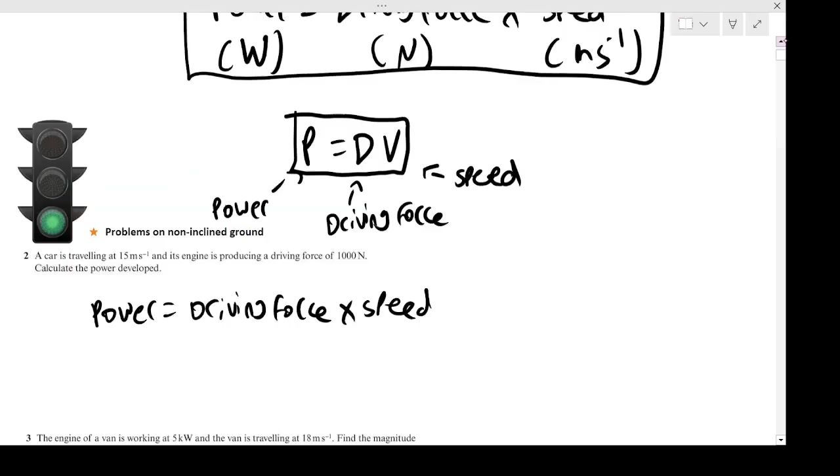So I got this question first. I'm told a car is traveling at 15 meters per second, and its engine is producing a driving force of 1,000 newtons. Calculate the power developed. So it's asking for the power effectively. So we know that the power, again, power is the driving force times speed, which we literally just went over a second ago here. So just simple use of a formula. My driving force, I'm told, is 1,000, and my speed is 15. Very simply, multiply them to get the power of 15,000 watts. Okay. And so there we are.

Okay, so now we've got this question, and I'm told the engine of a van is working at 5 kilowatts, and the van is traveling at 18 meters per second. Find the magnitude of the driving force. So essentially, he wants the driving force. Okay, so it's not explicitly mentioned power here. However, it says the engine of the van is working at 5 kilowatts. That's actually very subtly hinting at the rate of the work done.

Okay, so the engine is obviously pushing the van forward, right? The driving force. So the engine's pushing the van forward. The engine is working, so it's the rate. So that means the power is 5 kilowatts. Okay. Pay very special attention. They like doing that sometimes. They don't explicitly mention power.

Working very specifically means power. Okay, because remember, power is the rate of work. Okay, so the power is 5 kilowatts, but it has to be in watts. That's going to cause an issue. It's in kilowatts. So remember again, a kilo is 1,000, so we need to multiply by 1,000, which is going to be 5,000 watts.

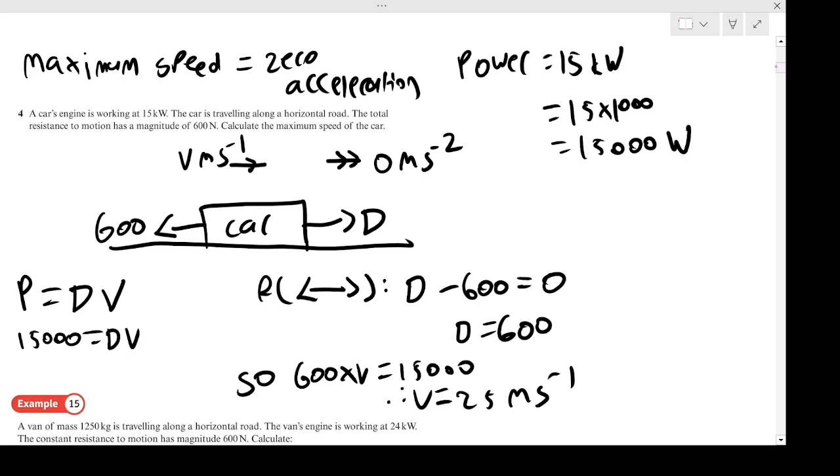So yes, we will be resolving a lot in this video. And so again, if you haven't seen it in normal maths, make sure that makes sense. But there we are. Okay, we've got this example here.

So now I'm told a van of mass 1,250 kilograms is travelling along a road. The van's engine is working at 24 kilowatts. The constant resistance to motion is 600. Calculate the acceleration of the van and the maximum speed. So it's kind of similar, but it's still a bit different to the last example. But let's have a look. Let's try and figure out what's going on.

So again, immediately I can spot this. The power is 24 kilowatt, and again we need to convert that to watts. So that's 24,000 watts, times by 1,000, right? There we are. Okay, now if I draw the situation again, it's on a road. I've got my van. I'm also told the mass now, which is 1,250 kilograms. I've got my resistance force, which again, if the van is going to be moving forwards, the resistance will act backwards like this, and that'll be 600.

And then there will be a driving force because there's power involved. Power means there's a driving force moving it forward. I'll call that D. Okay, and there's also going to be some speed and acceleration. So firstly, speed. I'm told the speed is 6. Okay. Now the acceleration is what they want me to work out. It's asking me to work out the acceleration at this speed. I'll call that A. Okay. So I need to figure out the acceleration.

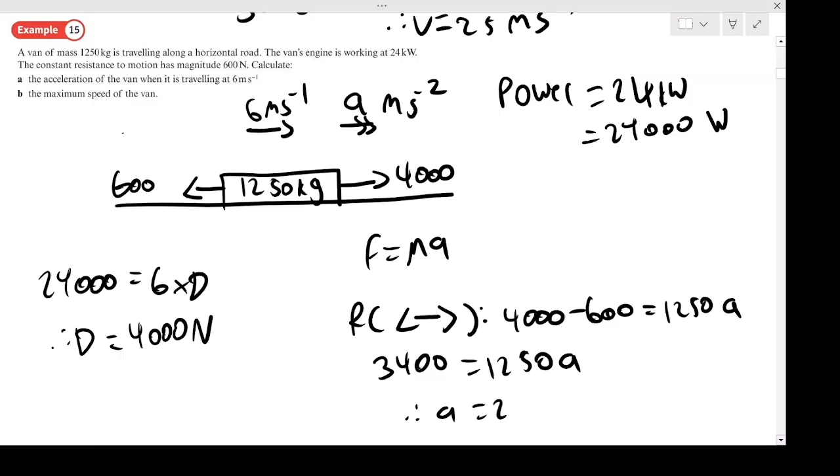So if I resolve again, forwards and backwards, right and left. Well, my right force is my driving force, which we found to be 4,000. Take away my backwards force of 600, my left force. And so that will equal mass times acceleration. Again, F equals ma. So the mass is 1,250 times A. Well, actually, if I just simplify this equation, that would be 3,400 equals 1250A. Then I can just divide by 1250 to get A. And I get 2.72. And there we are, meters per second squared.

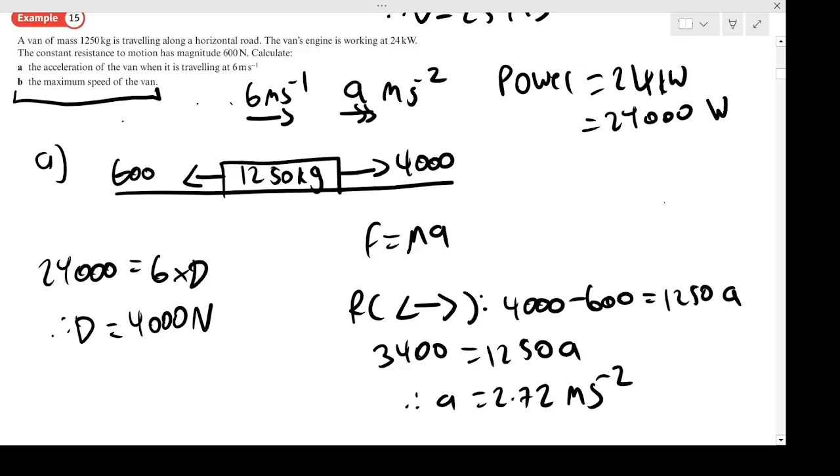Okay, and so now in part B, it's asking us to find the maximum speed of the van. Okay, so if I draw this new situation here. So I've got my van. Again, it will have the same mass, 1250 kilograms. The resistance force is still going to be 600 because it's constant, which means it will always remain the same. So that'll go back 600. The power of the van is still 24 kilowatts. The power remains the same as well. So 24 kilowatts. Well, that's 24,000 watts. So that's my power. Okay.

And so again, there will be a driving force acting forwards because power exists. However, in this case, not the power, the driving force, is going to be different. So I'm going to say D dash, okay, to signify it's a different D. So it's a different force to in part A, because the driving force now may change because the speed is going to change. Okay, so the speed changes, it's likely the driving force will also change with it. Because in part B the speed is different. It wants to find the maximum speed now.

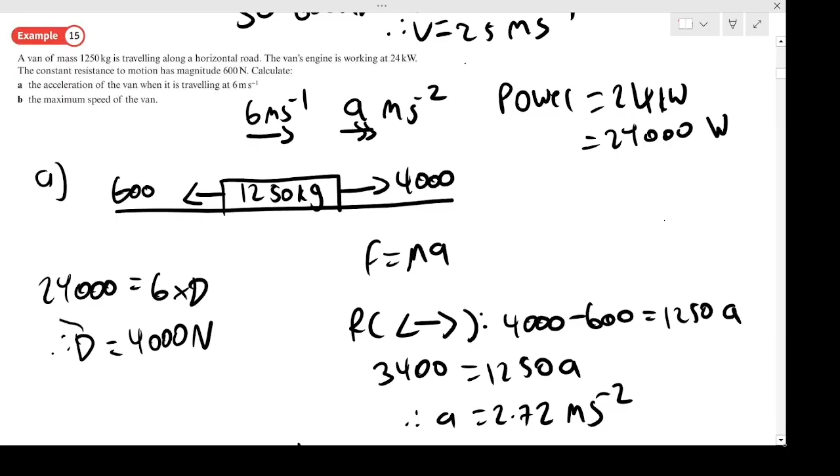And you can see it is different because my driving force in part A was 4,000 newtons, but now it's gone down to 600. So it may change, okay? So there we are. But now I know my driving force, so then I can use my power to say that 600 times V is going to equal 24,000, which therefore means my speed V is going to be 40, okay? So that is my maximum speed. Cool.

Okay, so hopefully you got the gist now of how we use power. Now we're going to look at more problems with angles. Okay. So we've got this example here. A car of mass 2,600 kilograms is traveling in a line. The instant when the speed is v, the total resistance is a variable force of 800 plus 5v squared newtons. The car has a cruise control feature to adjust the power to maintain a constant speed of 18 meters per second.

Find the power when, firstly, the car is on the horizontal road. So a horizontal road means it's completely flat like this, like we used to, right? Okay, so if I add my car, here we are, the mass is 2,600 kilograms. Now, I'm told the speed is v. However, they've told me actually speed is constant at 18, so actually I can just change that to 18, really.

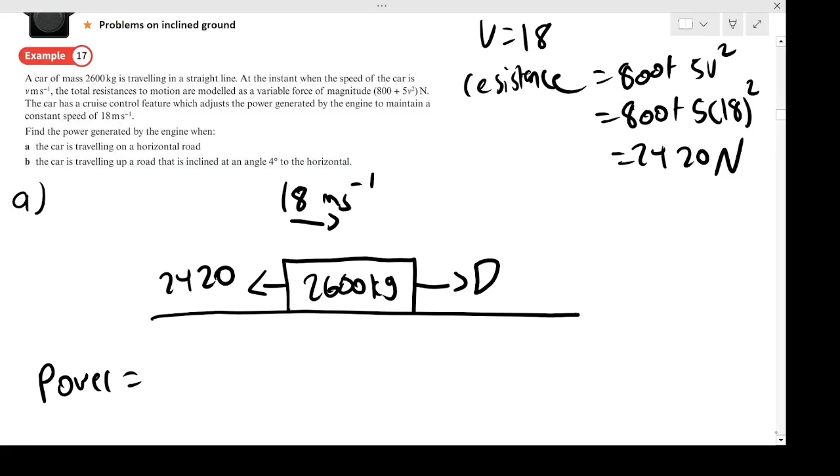Okay, so I can add that on to my resistance here. So the speed is 18, I'm told it, and then I can work out my resistance as well. There will also be a driving force because there's power. I'll call that D. And speaking of power, they want me to find the power. So my power is again speed, which is 18, times driving force D. So in order to find my driving force, I'm going to resolve forwards and backwards as usual. I've got my driving force forwards, take away my 2,420 backwards.

That's going to equal mass times acceleration, so 2,600. Now the acceleration, they've not told us explicitly, but I'm told that the speed is constant, which means the acceleration has to be 0. So constant speed, so the acceleration is 0, so it equals 0. Therefore, my driving force is just 2,420. Now we can easily work out power. Sub D in: 18 times 2,420. Get 43,560 watts. And so there we are.

Okay, now in part B, we're going to look at an angled slope. Now we're told the car is travelling up a road that's inclined at 4 degrees. So it's going to look like this. The angle probably is going to be a bit off, but I'm not that worried about that. So again, we've got our car on this surface that's 4 degrees, right? Again, the mass is 2,600. The numbers are going to be the same, so the speed is still 18. It's going to go up the slope with speed 18.

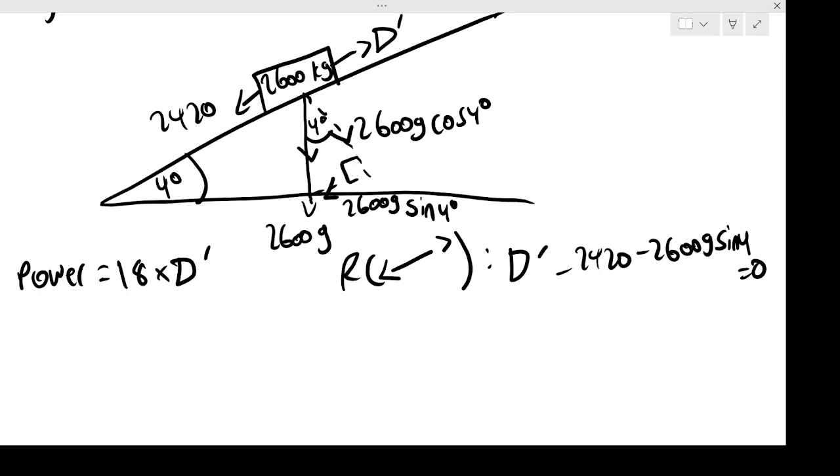Now, the force that acts along the surface, you can tell it's going to be this force here. It's 2,600g sin 4, and that's going to equal 0 because acceleration is 0. Okay, so that's just resolving forces on an angled plane. We've seen some examples previously, and hopefully you're familiar with this. So if I just rewrite this, bring it over here to make it clearer. So we have a driving force, take away the resistance, take away the weight that's along the surface.

So now we just simply solve this equation for D. So D is going to equal 2,420 add 2,600g, where g is 9.8, times sin 4. We get 4,197.4 newtons there. So that's my driving force. Therefore, my power is going to be 18 times 4,197.4, and that will get me 75,553.11 watts. And there's my power there.

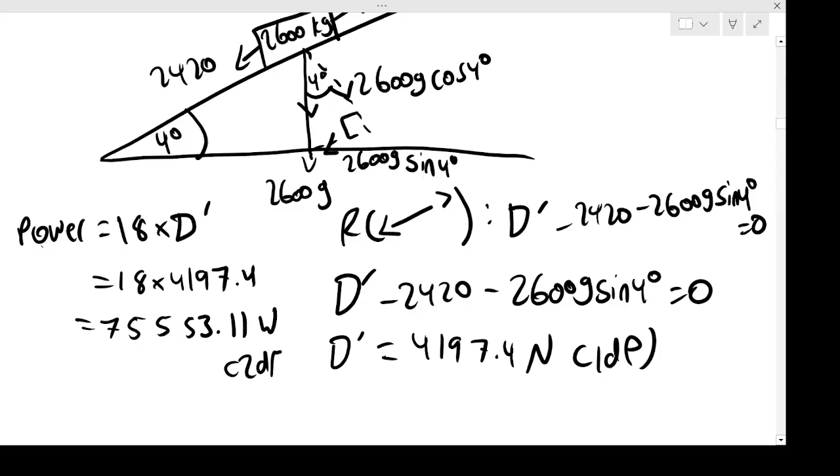Okay, cool. So it's the same idea, but now it's on the surface, so our resolving is going to be a tad bit different. Okay, but there we are.

Okay, so we've got this question here. So here I'm told a car of mass 1,100 kilograms is traveling at a constant speed of 15 along a straight road, which is inclined at 7 degrees to the horizontal. The engine is working at a rate of 24. So again, working rate, that's the language for power. So the power is going to be 24 kilowatts. And the kilo has to go to watts, so we need to times by 1,000. You get 24,000 watts.

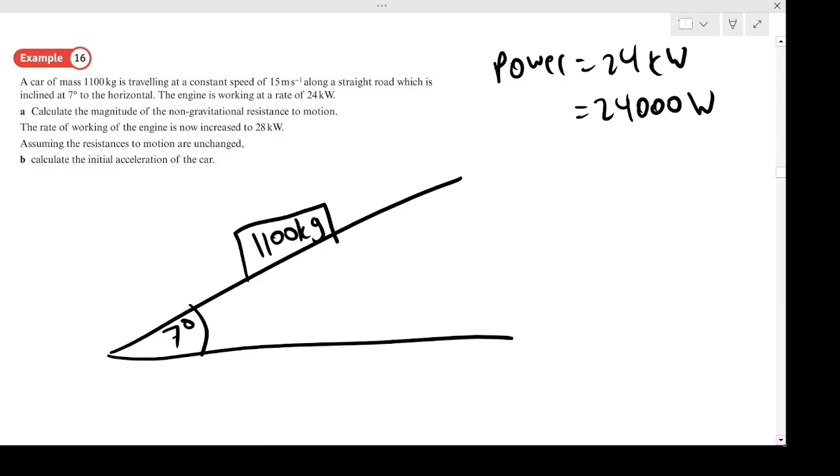Okay, so now if we actually draw the situation, I've got this angled slope. It's 7 degrees. I've got my car going up this little road at the angle 7. My car mass is 1,100 kilograms. The speed is 15 up the road, and because it's a constant speed, the acceleration is going to be 0. There we are.

Again, we've got our forces. So firstly, we've got resistance. So the resistance force acting that way. I'll call that F for, I don't know, like friction or something like that. So that's my resistance, and then my driving force is moving my car forward. Again, driving force because there's power involved. And I will add my weight. So that's mass times g, so 1100g. Hopefully we're fine with this diagram. That's pretty much it. Let's see what we need to work out.

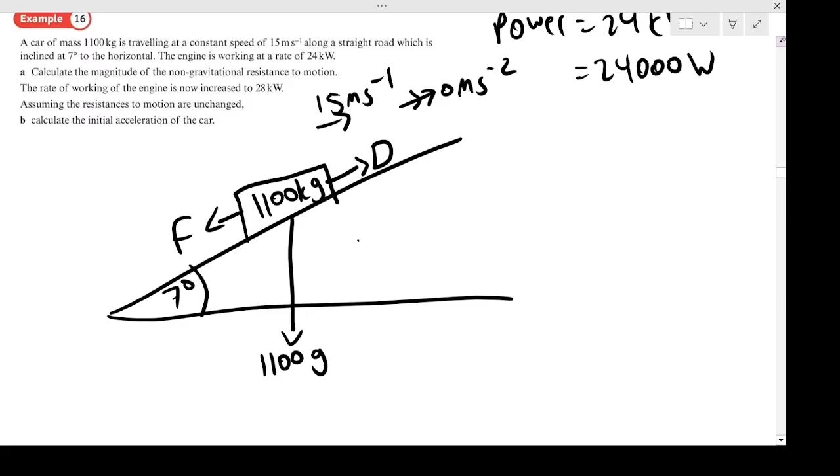We need to calculate the resistance force, essentially. So we need to find F. Well, firstly, I already have my power, so let's use that. Power is driving force times speed. So P equals DV. I know my power is 24,000. I also know my speed is 15. There's 15 lots of my driving force D. So dividing by 15, I get 1,600 newtons. Okay, so I'll add that on then. Cool. Right, but that's not my friction force, unfortunately. My resistance force.

What can we do now? Well, we can then resolve. Okay, I know my acceleration is 0. So if I resolve up and down the surface, then firstly up the surface is my 1600. Take away my resistance F. And then obviously there will also be a weight as usual. I need to split the weight up, so 1100g cos 7 and 1100g sin 7 here.

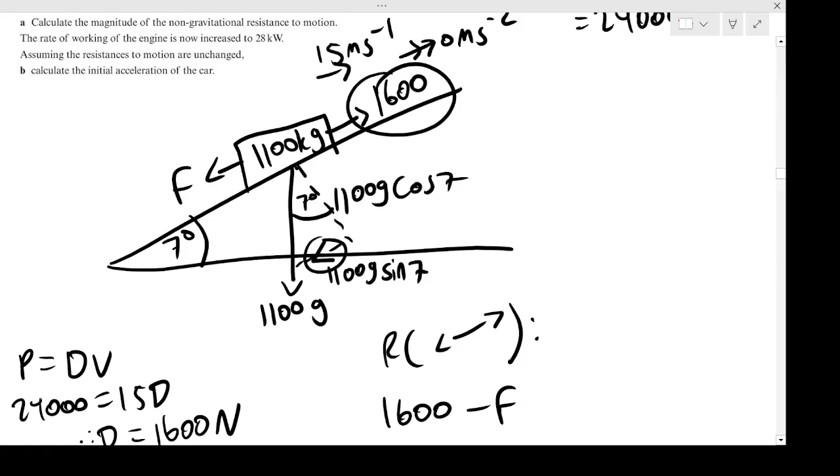Okay, so this 1100g sin 7 here, that's going to again be matching the slope, so that's going to act downwards. So that's going to be taken away. And so that's going to equal 0 because the acceleration is again 0 because the speed is constant. Okay? I can actually work out F then. So F is going to be 1600 take away 1100g sin 7.

So if I just put all that in the calculator, I get 286.25 newtons. And there we are. Okay, that's my F there. That's my resistance force.

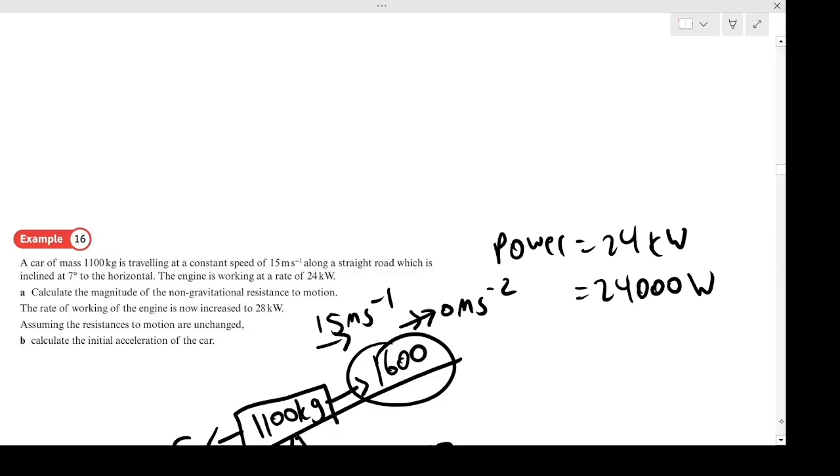Cool. Now I'm told the rate of working is now increased to 28 kilowatts. So the power's changed, and the resistance is not changed. Okay, so I'll make a note of that. The power is now 28 kilowatts. And in watts, that's 28,000 watts. Must do that conversion to watts.

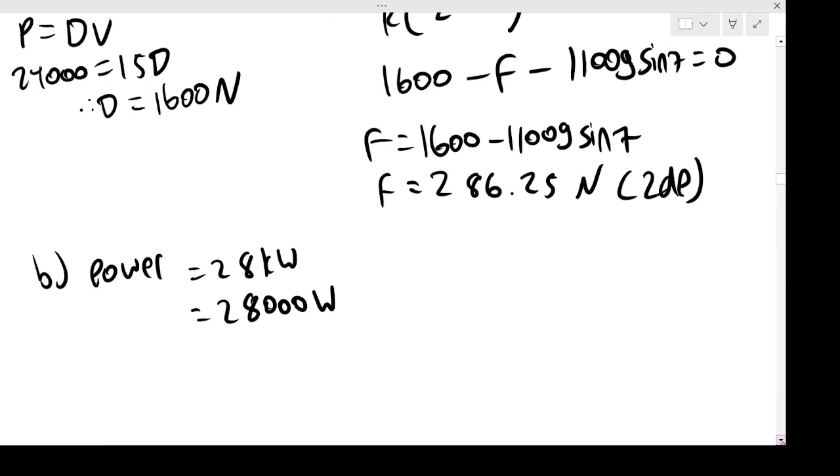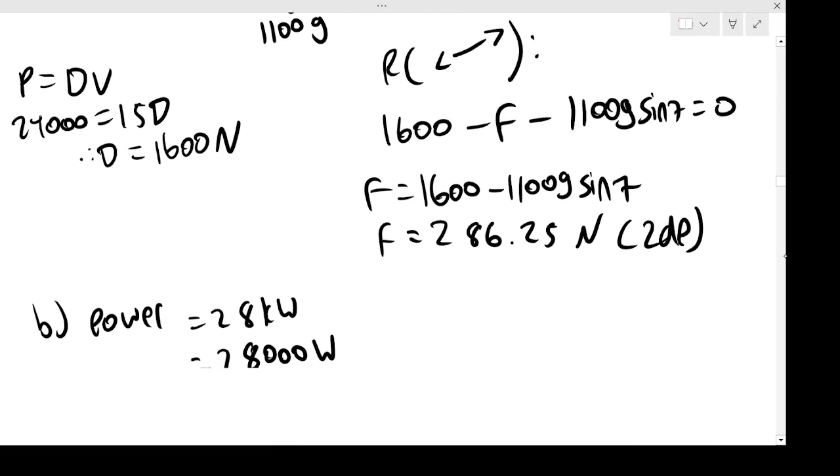Okay, so then if I draw the situation now, draw this diagram. It's still at 7 degrees. Again, not accurate, but there we are. Still got my car, that's 1100 kilograms. I have my resistance force, F, which I'm told is the same. So it's still 286.25. I'm going to have a driving force which probably will change now, so I'll call that D dash for a new driving force.

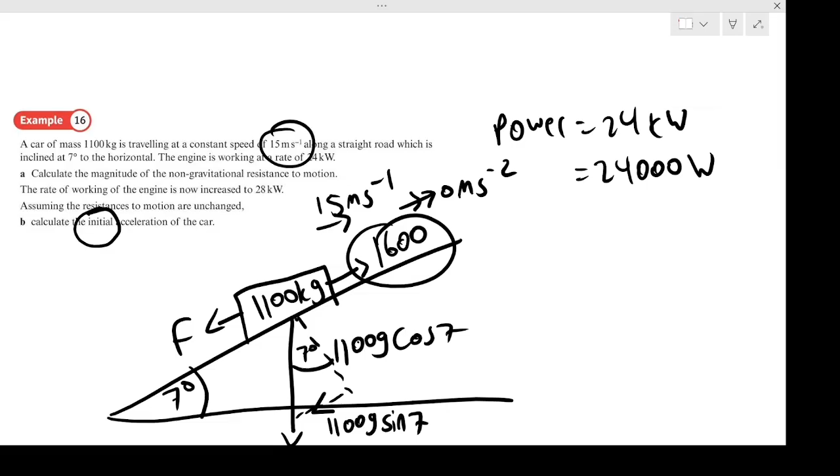Now, the speed will change as well. However, we're assuming that the speed will still start at 15. So the speed will now change. It won't be constant. But because we're only asking for the initial acceleration, at the start it will still be 15, but then the 15 will change. So the speed is still 15 initially in this situation here. Hopefully that made sense. The acceleration is what we want to work out, the initial acceleration after we change the power. So hopefully you are comfortable with this new setup.

Okay, so we want to find the acceleration. We know our power. We also know our speed. So actually we can work out a driving force. So power is again D dash times V. My power is 28,000. That's going to equal D dash times 15. So therefore my new driving force is going to be 1,866.67 newtons. There we are. I could add that on.

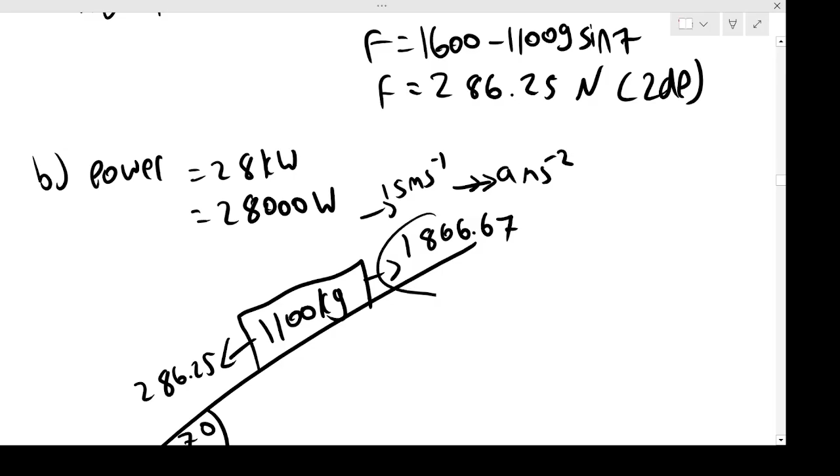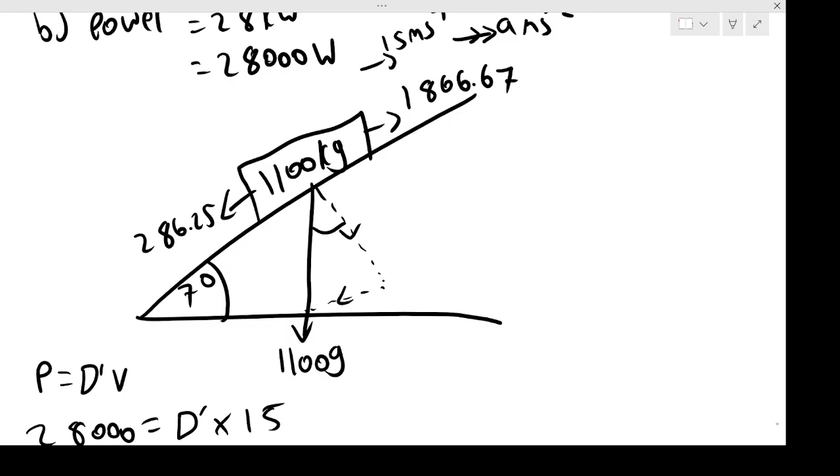Okay, cool. So if we want to find the acceleration, we're going to use F equals ma. We're going to resolve our forces again in the same way. Actually, I'll do it down here, not to make it too messy. So firstly, the forces up the surface. We've got my driving force, 1866.67, and then I have my resistance the other way, so take away 286.25, but of course there will also be weight involved. So my weight, 1100g, split up into these two parts: 1100g cos 7 and 1100g sin 7.

So again, we want to use the 1100g sin 7, because that's matching the direction of the slope, but it's going backwards, right? It's going to the left. Okay, so take away 1100g sin 7. So then that will equal ma. Now the acceleration is no longer 0. It's changed. So mass is 1100, so 1100 times a, the acceleration. Okay, so I can work out a now.

So if I now just simplify this equation, I get 266.668... equals 1100a. Therefore, just divide to get a to be 0.24, and so there we are. That's my acceleration.

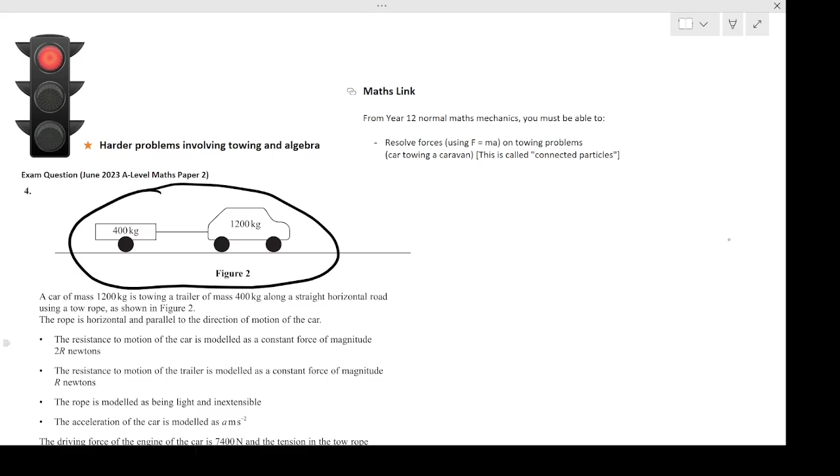Okay, so now we're going to look at the final set of questions. We're going to look at some exam questions in a bit. We're going to be looking at power involved with towing problems. You would have seen this from normal maths: problems where you have a car that's towing a caravan or some piece of weight. You can see it in this example here, a car towing some little thing there. So this is from normal maths, from year 12. But depending on how you do this course for further maths, sometimes you might do it before normal maths.

So anyway, it's just nice to have a recap of the essential skills you need. So what I'm going to do with this sort of problem, this was taken from an A-level maths past paper. I'm going to go over this little question quickly, just to demonstrate what you need to know, because you're going to need to know how to solve a problem like this for the other problems in a minute, okay?

So very quickly, this is the situation we've got going on. As I said, I've got a car that's towing, by some little rope here in the middle, something like a caravan. And so, if I draw this out a bit bigger, okay, so we're on a road. I have my car. Now the car, the mass is 1200.

Okay, it's towing, I'm gonna say, a trailer. A trailer. Okay. This thing here, and that has mass 400. Okay. So I'm just drawing it out in this way.

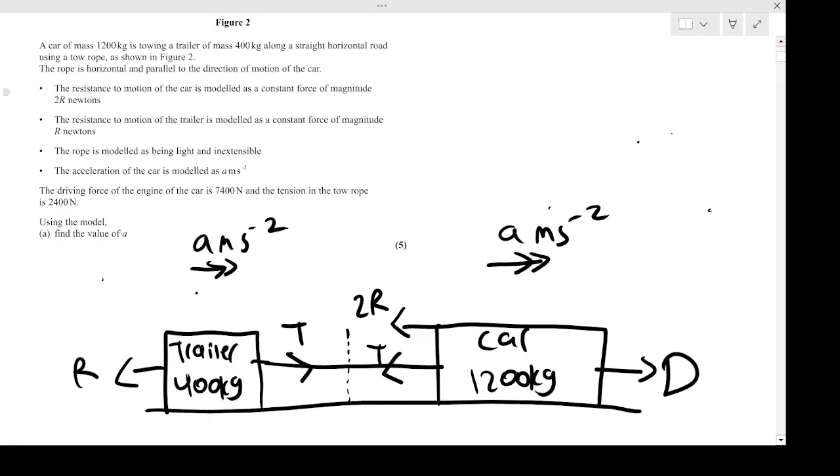So very quickly then, I'm also told the driving force of the car is 7,400. So I can say that the driving force here is 7,400, and also the tension in the rope, T, is 2,400 and 2,400 there. So we need to find the acceleration. The approach here is to look at the car and the trailer separately. All of this you hopefully should be familiar with if you've seen it in normal maths. So we're going to look at the car first.

To make it easy to visualize, I'll just draw the car on its own. It's got driving force forwards of 7,400, my resistance force of 2R, my tension force of 2,400 and the acceleration A. That's literally it. So I'm going to use F equals MA, resolving forwards and backwards. My forwards force is the 7,400, take away the two forces backwards, so take away 2R, take away 2,400, equals MA. The mass of the car is 1,200 times the acceleration.

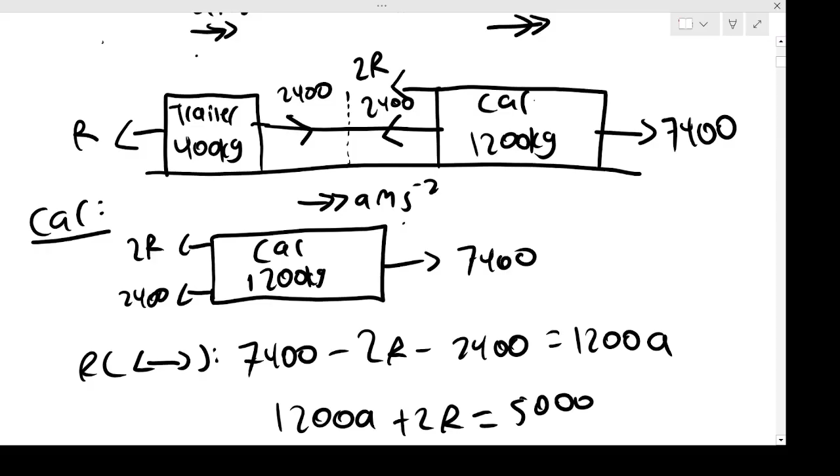And again, I'm going to just focus on the trailer. So if I just draw the trailer bit out, again, I've got my trailer. The mass of the trailer is 400 kg. And so as you can see here, the force forward is 2,400, and the force backwards is R, my resistance. Again, the acceleration will also be A.

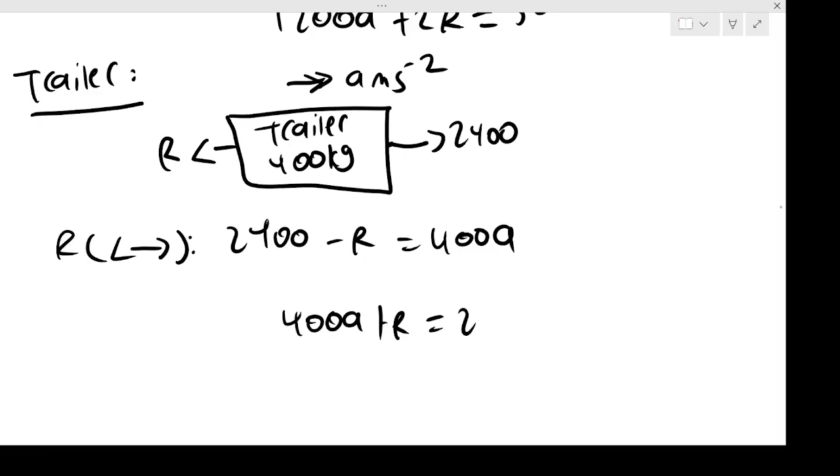Same one. So if I then resolve forwards and backwards for the trailer here, we get 2,400 take away R, going to equal MA. The mass is 400, lots of A. So again, we get this equation: 400A add R equals 2400. Now, what you notice then is these two different equations, one from the car and one from the trailer. And hopefully you notice we get some simultaneous equations.

So 400A add R is 2400, and 1200A add 2R is 5,000. So at that point we get these two equations simultaneous. We just solve them like any simultaneous equations. So we need to find A.

So very quickly, what we can do is times the first one by 2, let's say, to get 800A add 2R equals 4800, and then we can take these two away. So 1200A take away 800A, 400A. 2R take away 2R goes to 0. 5,000 take away 4,800 is 200.

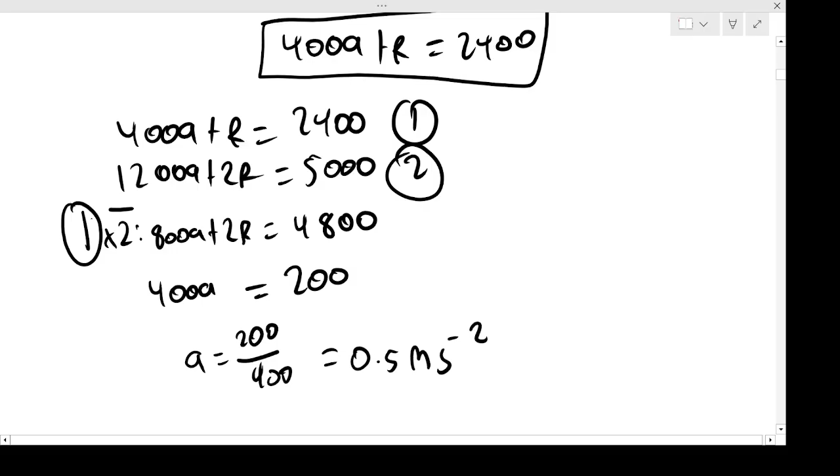So then to get the acceleration A, we just do 200 over 400, and doing that will get me the acceleration of 0.5 meters per second squared. There we are. So that's just a general rundown of these sort of towing problems, right? A car connected to a trailer, something like that. That's the idea. So we have this sort of diagram.

Hopefully you're comfortable with the forces I've added on. And the idea is to split up the car and the trailer separately to obtain what we want. Okay, so there we are. We'll be using what we've seen here now with these questions.

Okay, so we're going to look at this exam question, which is going to involve towing. So we have a car of mass 1,000 kilograms in a straight line along a horizontal road, constant speed u. The resistance is 400 newtons. The engine is working at a rate of 16. That's by power, right? That's 16 kilowatts. That's going to equal 16,000 watts.

Now, again, if I draw the situation, I'll do it here. Again, I've got my car on a road. The mass is 1,000 kilograms. The speed is u, and it's a constant speed, which again means the acceleration is 0. And so then there'd be a driving force moving it forward, because again there's power, and a resistance force, which we're told is 400, right?

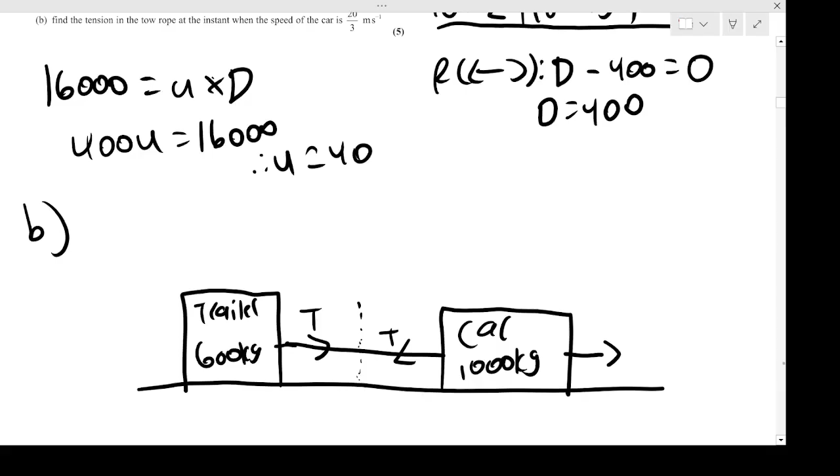Am I told what it is? I don't think so. So I'll just call that D, the driving force D, right? Again, I know there's a driving force because there's power mentioned, okay? Anyway, I'm also told resistance. So the resistance force for the car is 400. So again, if the car moves forward, the resistance is 400 that way. And then the trailer has its own resistance, which is 300, okay?

I think that's really it. Now, now it's going to be traveling at a speed. Has it? The speed, I assume, is still u. Okay, the speed is constant. Okay, so the speed is still going to be u, which is 40, right? And the acceleration, because

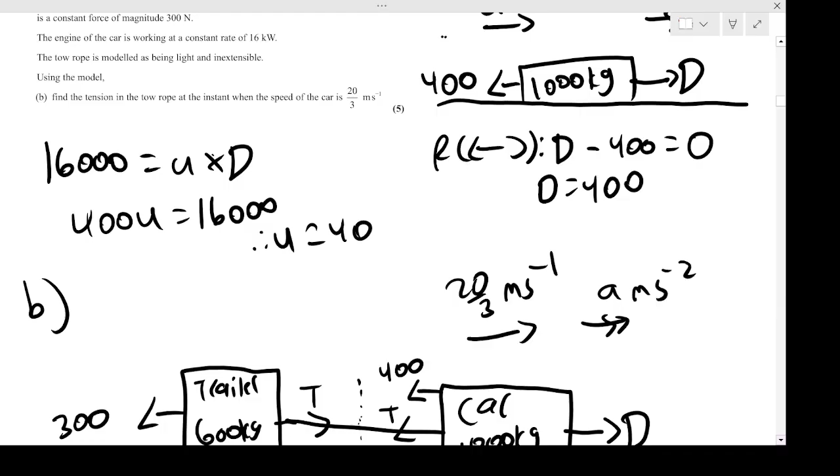Oh no, sorry. No, the speed is different because they told us the speed is now 20 over 3. My apologies. Because it's a different situation now, right? It's pulling a trailer, so it wouldn't be the same speed now. So they told us the speed is 20 over 3. Should have read the question there fully. There we are, though. That's the speed. The acceleration is going to be A. It's not a constant speed now, so the acceleration is not necessarily zero. Right, I think that's everything to label.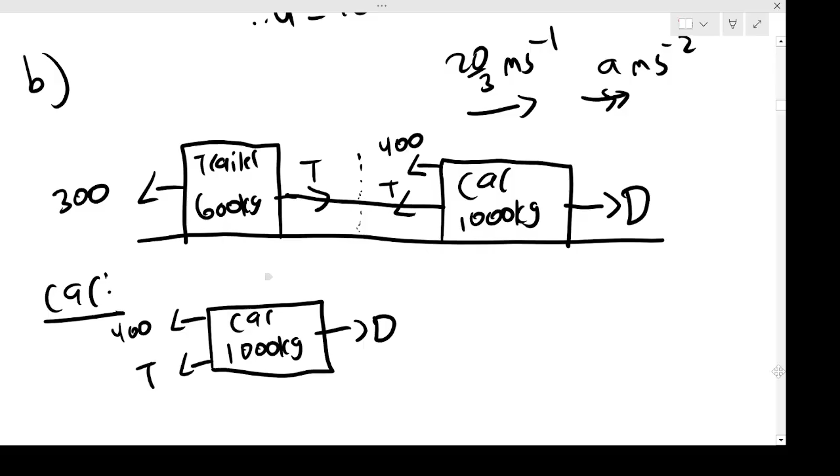Okay, a lot of stuff going on here, but hopefully that made sense how I got to the diagram. Once you get to the diagram, it mostly should fall into place. So they want the tension, which again is this tension force T. So what I'm going to do is split up the car and the trailer separately. Firstly, let's have a look at the car. Just to make it easier, I'm going to draw it separately. I've got driving force forwards, then my 400 Newton and my T. This acceleration is going to be A, and my speed is 20/3.

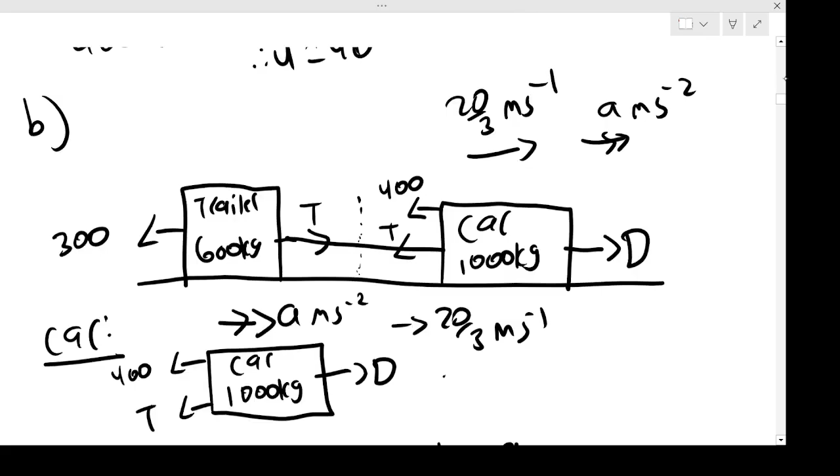Okay, so again, I could resolve forwards if I want to. That's going to be D, my force forward, take away these two forces backwards, so take away 400, take away T, equals MA. Now the mass is 1000, the acceleration is A. Now I can't do anything here. I don't know D, I don't know T, and I don't know A, so it's not really ideal. But I know the power is still 16 kilowatts or 16,000 watts. So I'll make a note: also power is 16,000 watts.

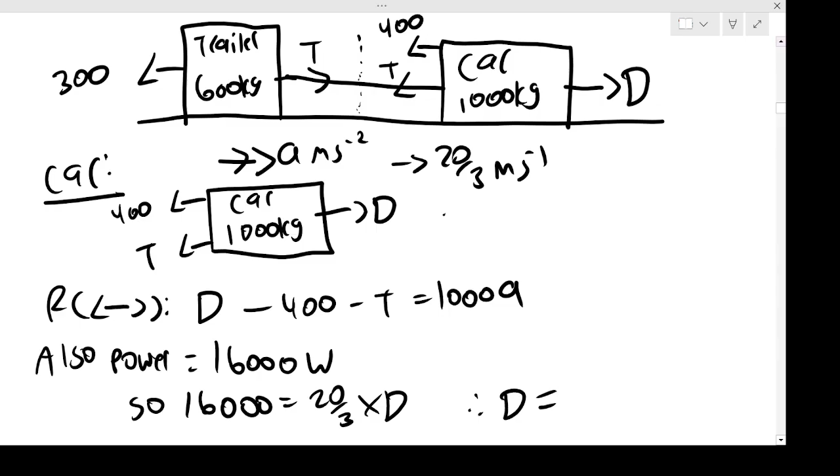And I also know that power is speed times my driving force. Now the speed I'm told is 20/3, right? Therefore my driving force, if I do 16,000 divided by 20/3, put that in the calculator, I get 2,400 newtons, and there we are. I can add that on here. I'm going to box this equation here. I'll come back to that. That's everything to do with the car. Now I'm going to look at the trailer.

Okay, now the trailer. If I draw the trailer here, that's 600 kg. I have the tension acting forwards and the 300 resistance backwards. Again the same acceleration there. And so if I resolve forwards and backwards here, again use F equals ma. So my forward force is T. Take away the backwards force 300 equals ma. Mass is 600 times acceleration a. So we get this equation here.

So ultimately, this is my equation from the trailer, and this boxed one is from the car. So if I combine this together, if I copy the car one, I have D take away 400, take away T equals 1000 A. But actually, we do know what D is. Remember, we saw that D was 2400. So we can sub that in here. And so 2400 take away 400 is just 2000.

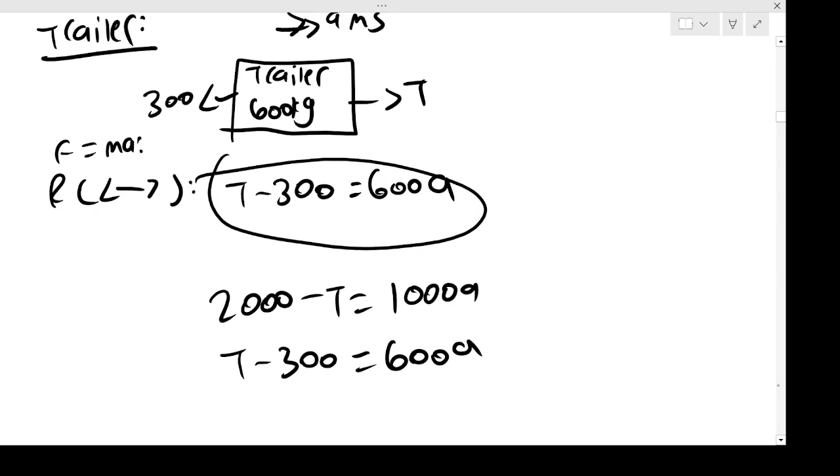So 2000 minus T is 1000A. And then if we remember this equation we just got, we got T take away 300 is 600A. And so these two equations now are simultaneous, so we can solve them. So firstly, if I rewrite this just a little bit, if I say minus T add 300, hopefully then you can spot we just need to add them to get rid of the T. So then I get 2000 take away 300 is 1700 equals 1600A.

Therefore, A is going to be 1.0625, and that's all the digits. Okay, there we are. Now I can sub that in to find T. So if I substitute it into this bottom one, T take away 300 is 600 lots of A, which is 1.0625. Therefore, T is going to be 300 add 600 lots of A. So I get T to be 937.5 newtons.

And that, I believe, is the tension in the tow rope. There we are. Okay, so that's the whole idea, right? Again, we just consider the car and the trailer separately, and after that, it's basically the same sort of steps. Okay, so I've got this question here. There's no towing involved here, but it's a bit of algebra this time.

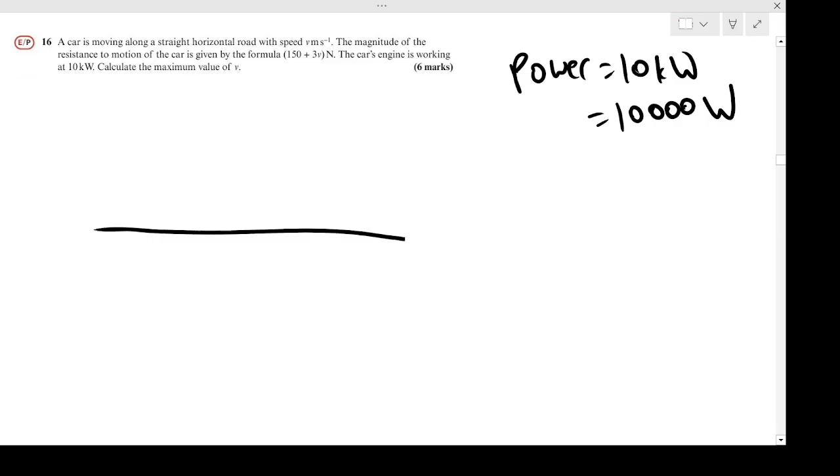So we're told a car is moving along a straight road, speed v. The resistance is this formula here. The power is 10 kilowatts. Again, I'm going to note that the power is 10 kilowatts, which is 10,000 watts. Okay, so if I draw the situation, I have my car. They've not told me the mass of the car, weirdly, so I just have to leave it there for now. There's my car. The speed is v.

Again, there's going to be a driving force D because there's power involved. But also there's a resistance force. Now the resistance force is actually this expression here, 150 add 3v. It's in terms of v. But again, don't be thrown off by this. It's going to be the same steps, just with algebra with letters involved. They're asking me to work out the maximum value of v. Now, v is a speed, so it's just asking for the maximum speed essentially.

But we know that max speed means the acceleration is 0. So I can add that on: 0 acceleration. Right, so I need to find v here. So firstly, again, I'm going to note my power. Power is 10,000. That's going to equal my driving force D times speed v. Of course, to find v, I'm going to need my driving force. If I resolve forwards and backwards, it's going to be D take away...

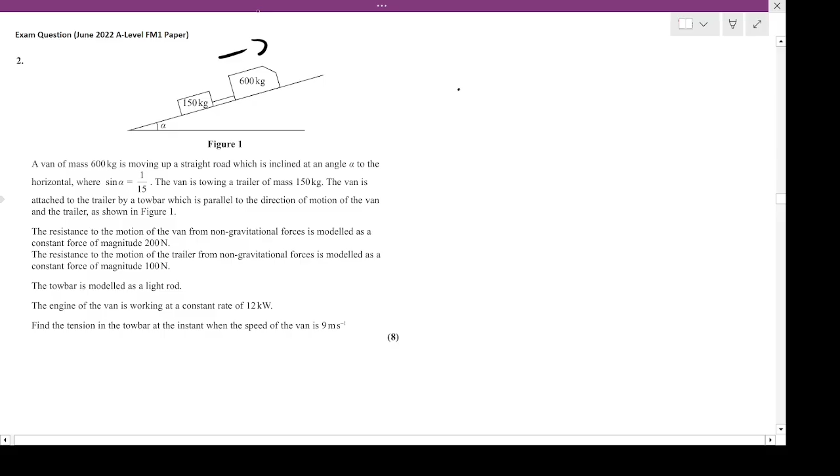The van's towing the trailer. And we're given some information about resistance forces. The power, the engine is working at 12 kilowatts. We should know that means it's power. So the power is 12 kilowatts, which again means in watts is 12000 watts. Okay? And it's asking for the tension, given the speed of 9. That's actually quite similar to one of the earlier examples we just looked at, but it's quite meaty, 8 marks.

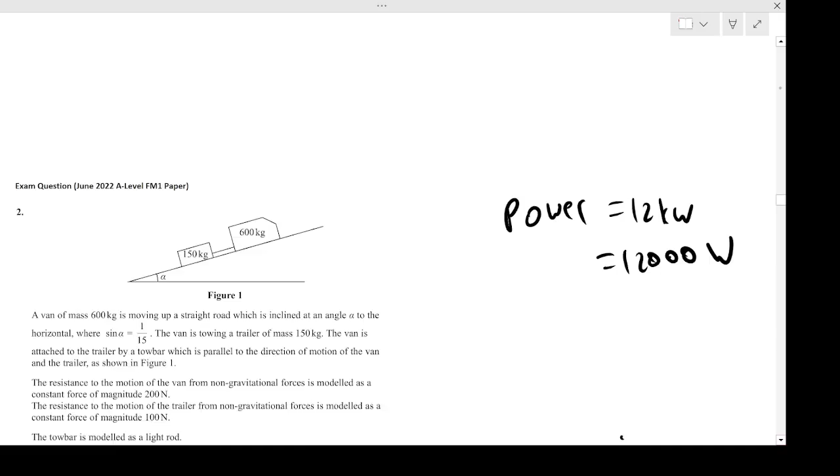Now, even though they're giving you a diagram, I do think it's helpful to draw it even bigger on your own, because there's going to be a lot of things we need to draw on. It's just not enough room, I don't think. Like, draw it really big like this, right? So again, we've got my car. Now, the car is 600 kg. That's towing a trailer like this. So this is my trailer. The trailer mass is 150.

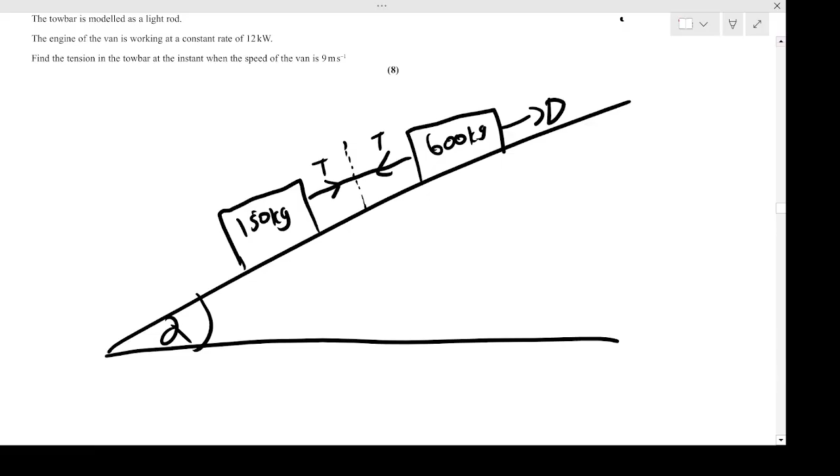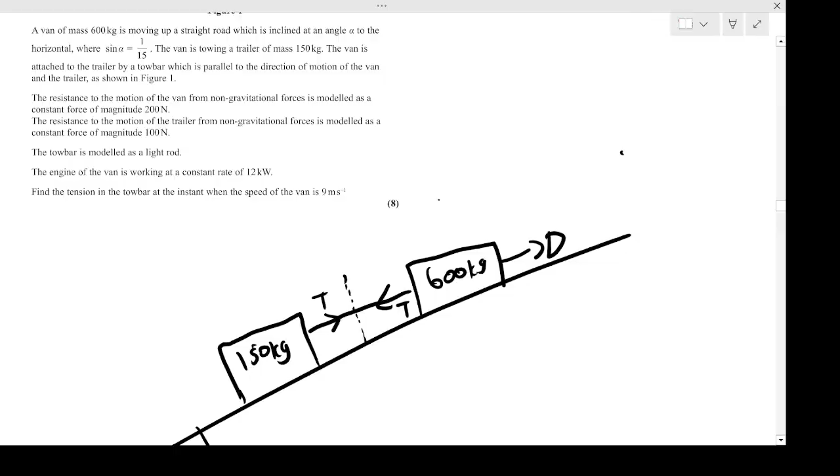Okay. Now, right, we need to add on our forces. So, firstly, in the rope, there's tension either way. So this is the car, right? So the tension is going to go that way, and then tension that way for the trailer. And then there will be a driving force up the ramp at the car, because that's what pulls it forward. There's power. There we are. Then we've got our resistance forces. So they told us the resistance of the van is 200. So at the van, which again is here, that's going to be 200 backwards. And then for the trailer, the resistance is 100.

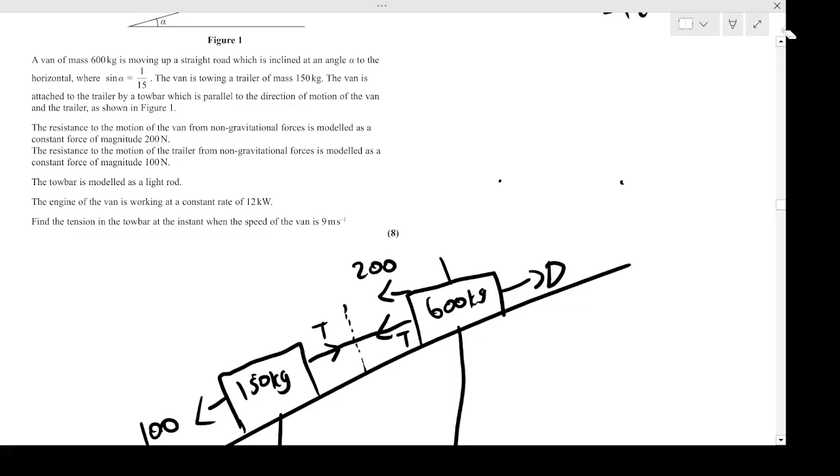So hopefully you're with me here, how I got this diagram here. I think that's all the forces, I believe. Of course, there will be mass as well. So the trailer, if the mass is 150, the weight will then be 150g. Likewise for the van, the weight is 600g. Remember, weight is mass times g. And that's all the forces. Obviously, there'll be a reaction force, which will be different, R prime, but I'm not gonna overcomplicate it unnecessarily. So those are my main forces here. So hopefully you're happy with this.

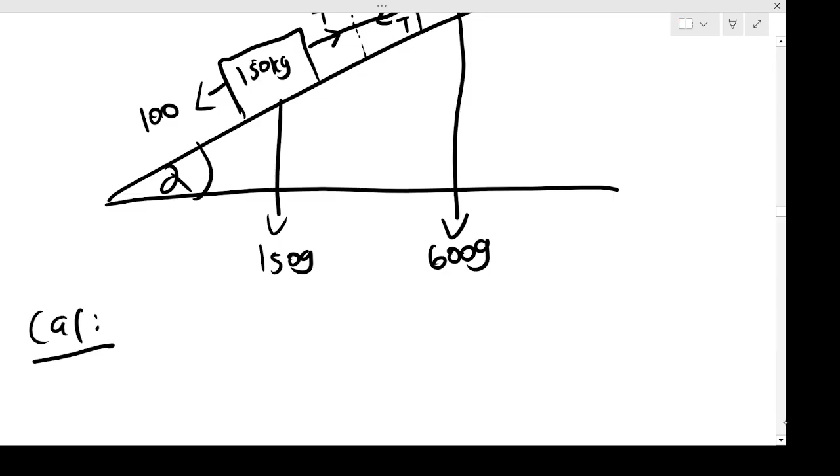So then at that point, now we just start to form some equations, right? Let's do some resolving and use our power. So firstly, again, we're going to look at these things separately, as usual, as we've just seen. So firstly, we're going to look at the car. So if I draw the car out, I've got the angle alpha, got my van, not car, van. My van, again, at 600 kg. It's going to have a weight of 600g down here. The driving force is D, up the road. And then I've got my tension in the rope, and then the resistance, presumably friction, would be 200. Okay, so there we are.

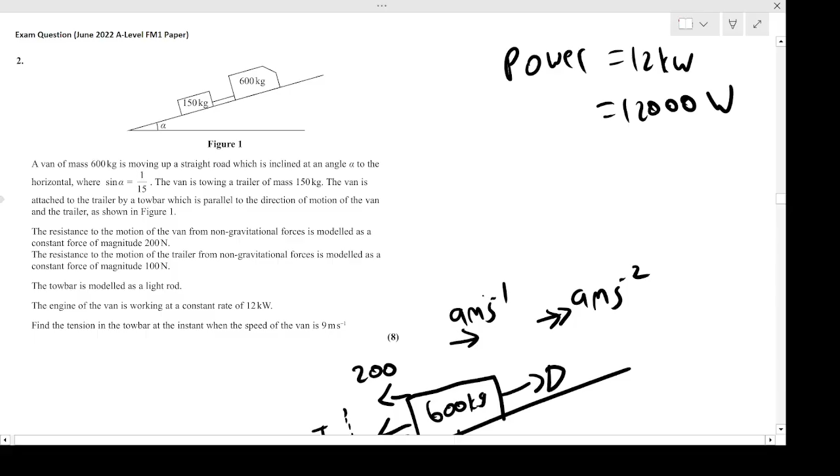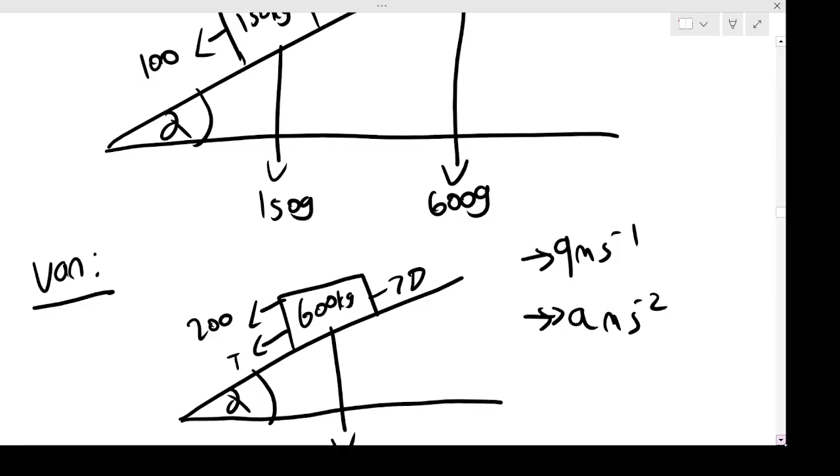And also, there would be acceleration, and a speed of 9. So the speed is 9, and the acceleration is a. Again, it's not 0 because it's not constant speed or max speed. We're just told the speed is 9. Okay, so that's everything, right? So I can add that on here. My speed is 9, and my acceleration is a meters per second squared. Cool. So hopefully you're happy with this, how I just isolated the van forces here. I just separated it to get the van only. Right.

So again, if I now resolve up and down, I have, firstly, the force up the ramp is D. Take away the forces acting back, which is 200. Take away the T as well. But also, in addition, the weight, which is why I included it, we need to include it. So that'd be 600g cos alpha and 600g sine alpha here. Again, this sine alpha part of the weight is also going to act down the road, down the ramp. So we've got this equation here. So my forward force up, take away these two forces down, and also the weight down in the same direction there. And that's going to equal ma, where the mass is 600, times a.

Okay, right. So if I rewrite it here, I've got D minus 200 minus T, then minus 600g, that's going to be 600 times 9.8, so it's going to be minus 5880 sine alpha equals 600a.

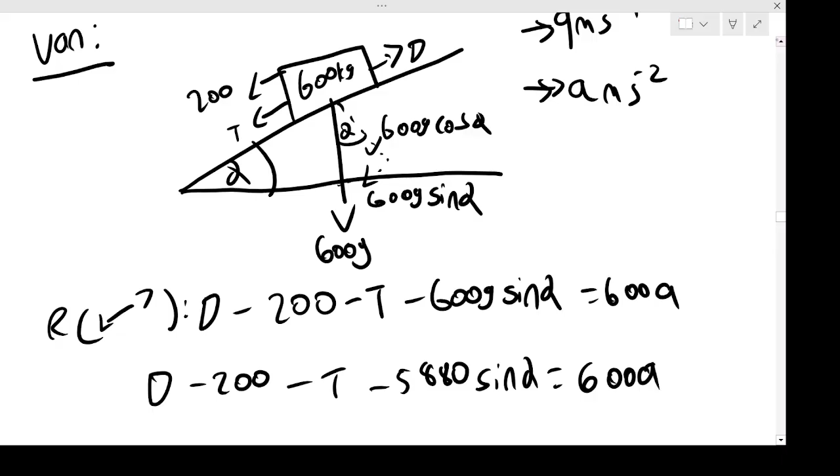Okay, now this sine alpha, again, we're actually told what sine alpha is. We don't know what alpha is here, but we know sine alpha is 1 over 15. That's all we need to know, right? So actually, this bit here, minus 5880 times sine alpha, which is 1 over 15, that goes to minus 392. Okay. So what I've done now is just simplified this. So what I did was 600 times g, which is 9.8, times sine alpha, which is 1 over 15. I got 392, just to clarify what I did there.

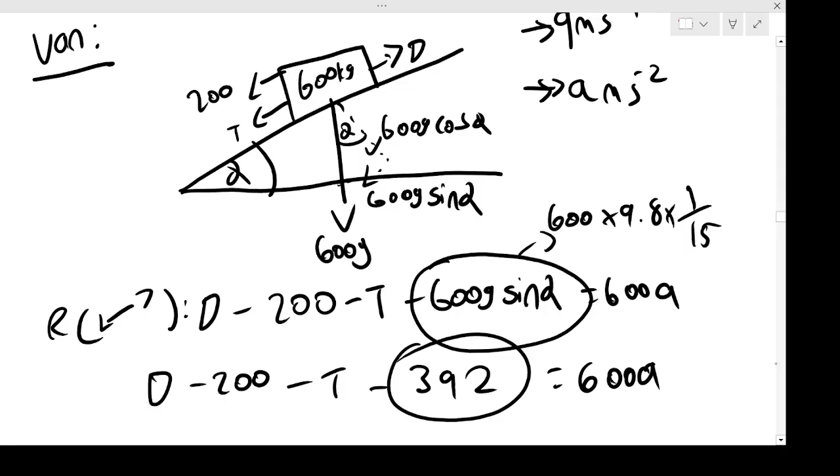Okay, right. So I get this equation, and actually I can simplify it even more, just a little bit. If I do minus 200 minus 392, so D take away T take away 592 equals 600a. That's my final equation here. I can't do anything more.

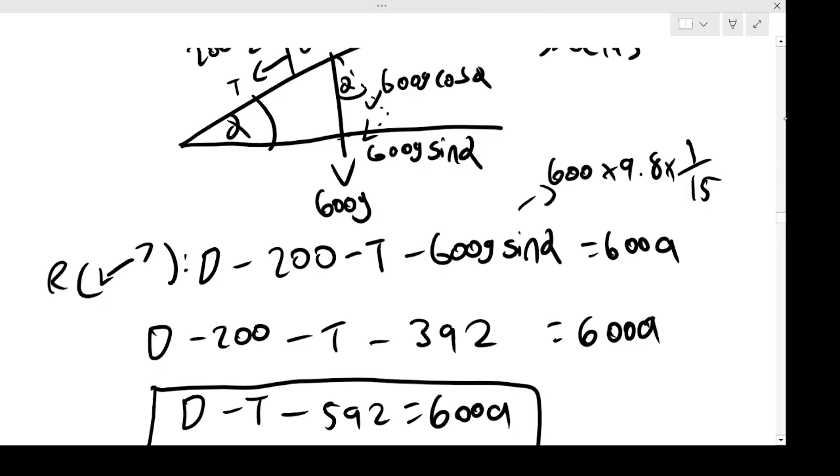But what I also know with the van is the power of the van, which is 12,000 watts. So my power of 12,000 is going to equal the driving force D times the speed. Now I'm told that the speed, as you can see here, is 9. Okay, so D times 9, therefore I get D to be 1333.33 newtons. So then I can simplify this equation even more, because now I know what D is. So therefore, 1333.33 take away T, take away 592 equals 600a. And that is the equation we get simplified. Okay.

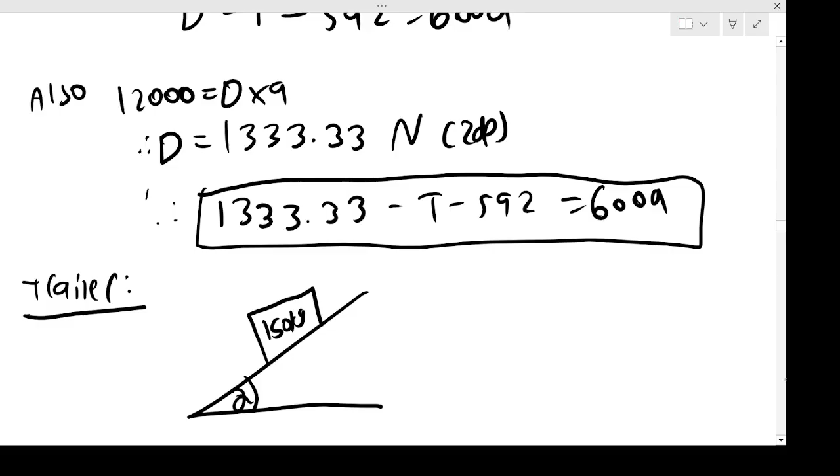Right, that's the van. Now we're going to do the same for the trailer. So now if we look at only just the trailer, again, we're going to draw a ramp. We've got the trailer here. The mass of the trailer is 150. If you see here, we've got the tension force forwards, and then the resistance, which I think is 100. Yes. Okay. And then, of course, there will be weight that pulls it down, so that'd be 150g. Should probably split that up in this way. So we've got alpha, so that'd be 150g cos and 150g sine. Okay, and then also I've got my speed, which is 9. I won't need my speed here though, but I'll add it. And also the acceleration is a as well.

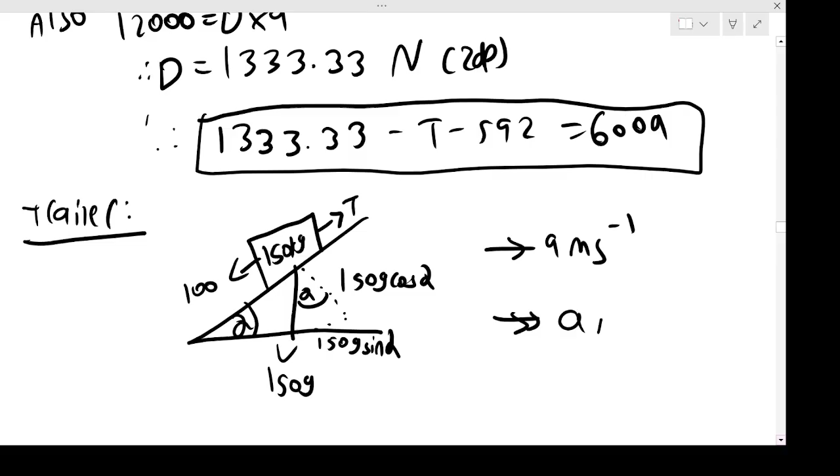Okay. Now, if I use F equals ma, by the way, just to clarify, I'm not going to use power here. Power does not apply to the trailer. The driving force is specifically tied to the van; the power comes from the engine of the van. So do not consider power from the trailer. Just to clarify. Okay. But anyway, the only thing we can do is F equals ma, like we are used to.

So if I now look upwards, that's T, take away my downwards of 100, and then also the weight of 150g sine alpha. That's going to equal ma, where the mass is 150 times a. And actually, I can simplify this. T take away 100, take away 150g, so 9.8, times sine alpha, which is 1 over 15, that's in the question, is 150a. So if I simplify this, I get T take away 100, take away 150 of 9.8 of 1 over 15. I get T minus 198 equals 150a. And that is my equation from the trailer.

So again, if I then bring these two equations I've got together, firstly I've got this equation here. 1333.33 take away T, take away 592. Oh, actually we can simplify this, sorry. 1333.33 take away 592 is going to be 741.33. 741.33 take away T is going to equal 600a. That's from the van, remember? That's from this equation here. And then we use this equation too. So then we get T take away 198 equal to 150a. So we've got these two simultaneous equations here. Okay.

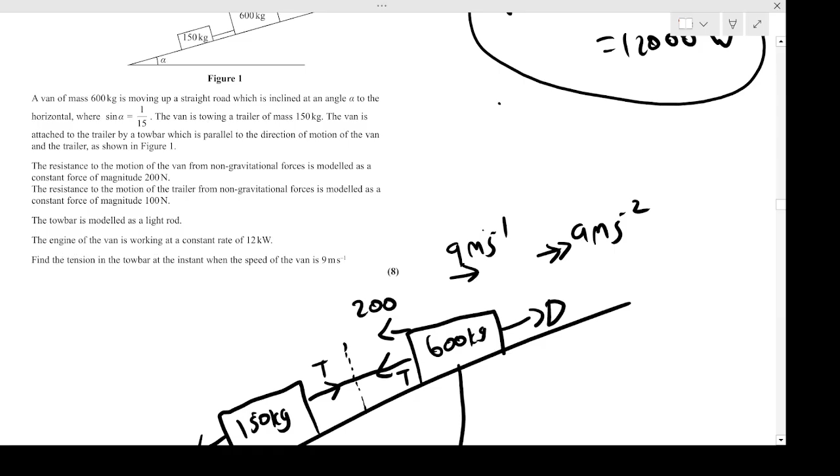Okay, so hopefully, again, make sure you look through it step by step. Hopefully, even though there's a lot of stuff going on, the steps make sense, and you'll start to see it's the same sort of stuff every time, really. But there we are.

Okay, I'm going to finish off with this one. And it's very hefty, quite a hard question, and kind of brings everything together because you can see there's work energy principle involved as well at the end. So here we are. Okay, so firstly on this block of text, we're told a car pulls a trailer of mass 150 on the straight road. The trailer is connected by a light and inextensible tow bar. Resistance of the trailer. Okay, blah blah blah.

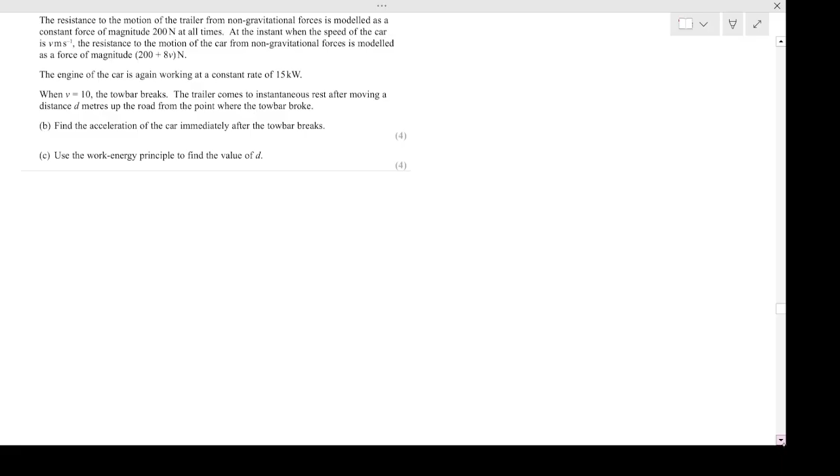Right. So if I draw the situation again, what's happening is I've got a car towing a trailer on a straight road, like this. I've got my car. The mass is 600 for the car. Again, then that's towing a trailer. The trailer is 150 kg. And again, then if I split it in the middle, tension acts away from the car and pulls the trailer forward. So those are my two tensions, either side.

There are resistance forces. So the resistance of the trailer is 200 newtons. So from the trailer, 200 to here. And then the car, the resistance of the car is in terms of V. It's this 200 add lambda V. So this lambda is just, again, it's like a number, right?

Okay. So then we're told when the engine of the car is working at a constant rate of 15, so that's my power, right? So I'm told the speed is 25. Okay. So I'll make a note of that. So the speed is 25. And I'll also make a note of the power, which is, what's the power? 15 kilowatts. So again, we need to convert that to watts, so 15,000 watts.

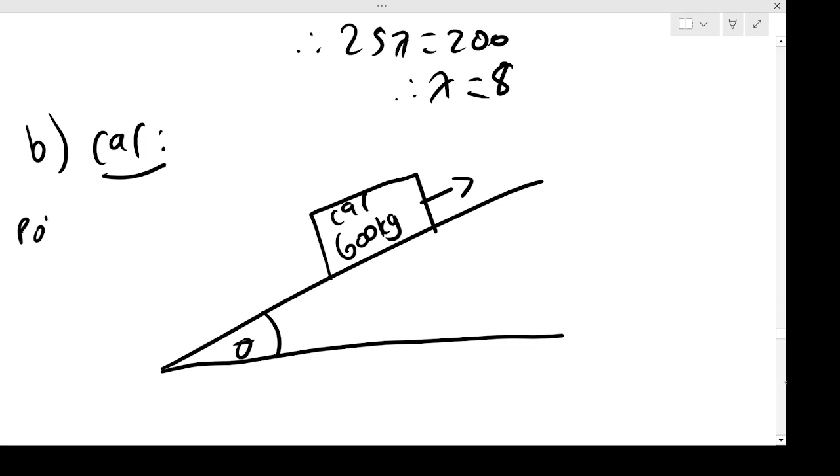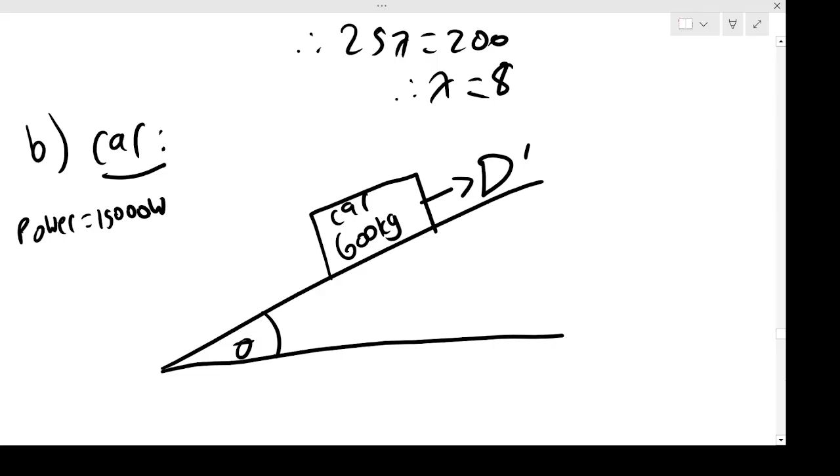The power, 15,000 watts. There's still going to be a driving force. It might be different now to the one in part A, right? Because the speed has changed. So a new driving force D dash. There won't be a tension force anymore, because the tension in the rope is gone because the rope has broken. So there's no tension forces acting on either vehicle. The only force backwards on the car is the resistance. Now the resistance of the car, we're told, is this 200 add 8V. I'll add that on. So it's in terms of V, the speed.

200 add 8V. Of course there would still be weight of 600g, so mass times g. If I split this up, I have 600g cos theta. If we use SOHCAHTOA, this is my right angle, 600g is my hypotenuse here. Then 600g sine theta there. Those are all my forces now. You can see the car is completely separate. There's no rope anymore, no tension. So that's my full diagram that I need.

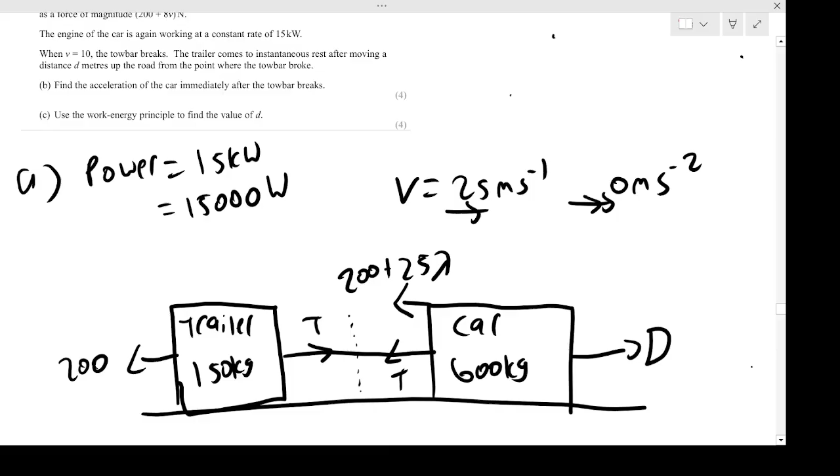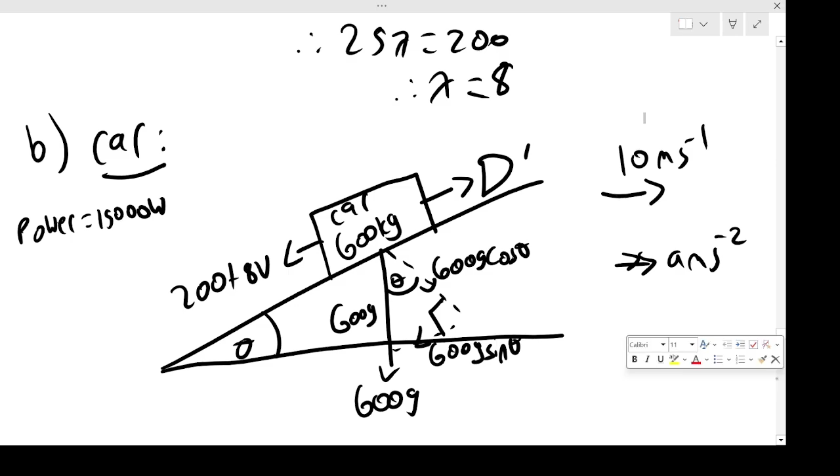Of course, there would be speeds. When the tow bar breaks, the speed is 10, V is 10. So I'll make a note of that. The acceleration is A. That's what he wants me to work out for part B, the acceleration of the car. But I think we can simplify this resistance force, because it's 200 plus 8V, but we know that V is 10. So 200 plus 8 lots of 10 goes to 280. So I can just simplify this to 280. And there we are.

Right, and that's everything. So I need to find the acceleration. So what can I do? Well, firstly, again, I know I have power. So power is 15,000. That's going to equal my driving force D prime times the speed, which is 10. Therefore, my driving force in this situation is going to be 1500.

Okay, so I can add that onto my diagram then, right? 1500. And there we are. Okay, now I'm going to resolve to get my acceleration. So if I now resolve up and down the road, well, firstly upwards is 1500. Take away this force down, but also the other force acting down in that way is the 600g sine theta. And that's going to equal MA. Well, the mass is 600 from the car, lots of A, the acceleration.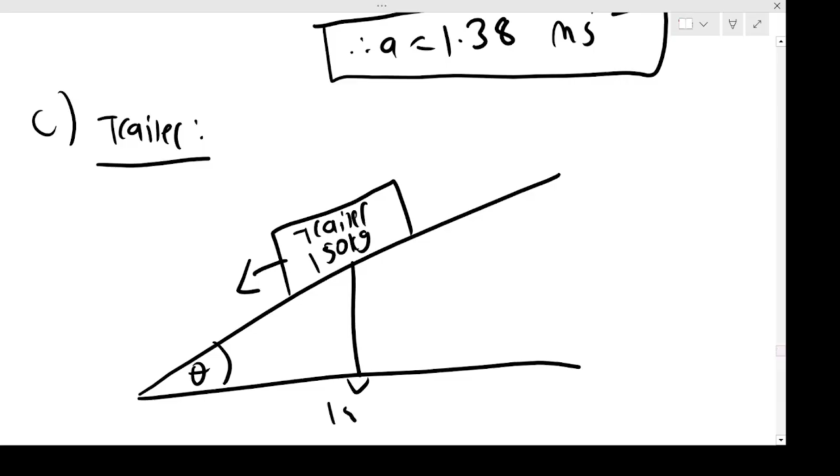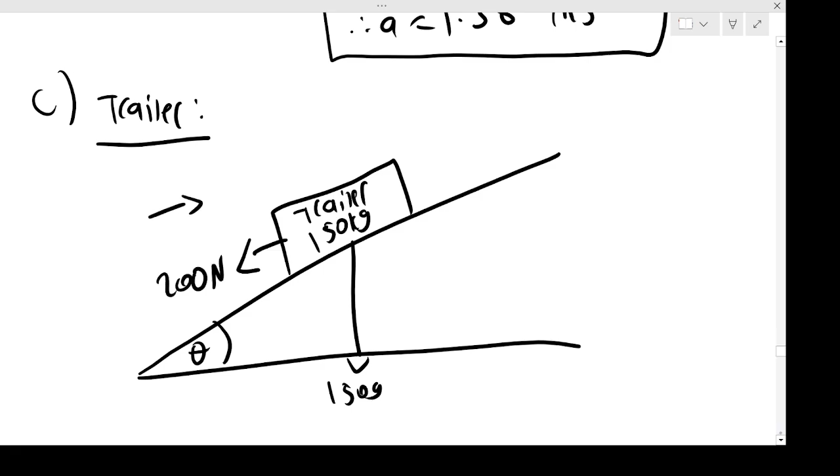So the only force backwards, obviously we've got a weight, which is 150g, but resistance wise, the resistance force we're told is 200 newtons. That's the resistance of the trailer. So 200 newtons backwards. Okay, so hopefully with me here then, that's pretty much the setup. Again, it will have speed. It has initial speed 10. That's the moment the tow bar breaks and they're disconnected, and then eventually it will have speed 0.

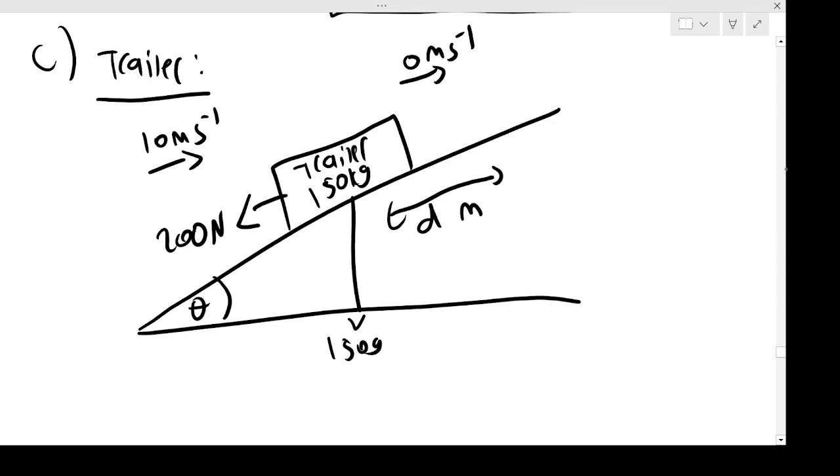Okay. So there we are. So that's pretty much the setup. Those are the forces really. So the idea is the trailer has moved a distance d meters up the ramp after it breaks until it stops. They want me to find the distance d it moves up the ramp between these two speeds using the work energy principle. So remember then, cast your minds back to the last part.

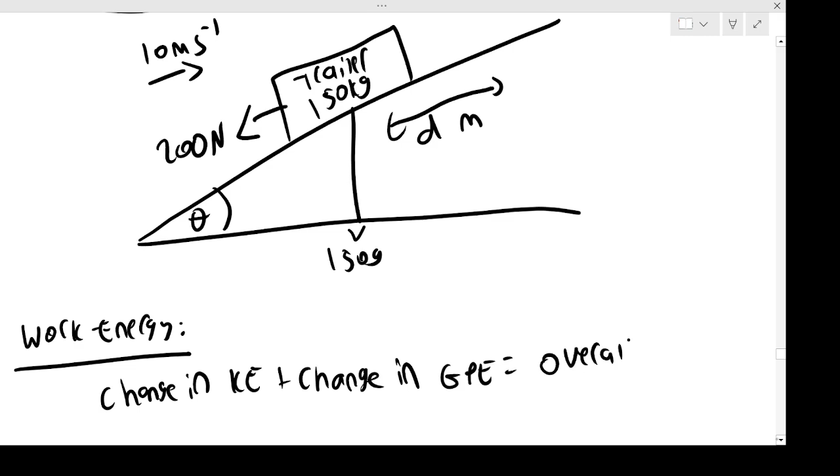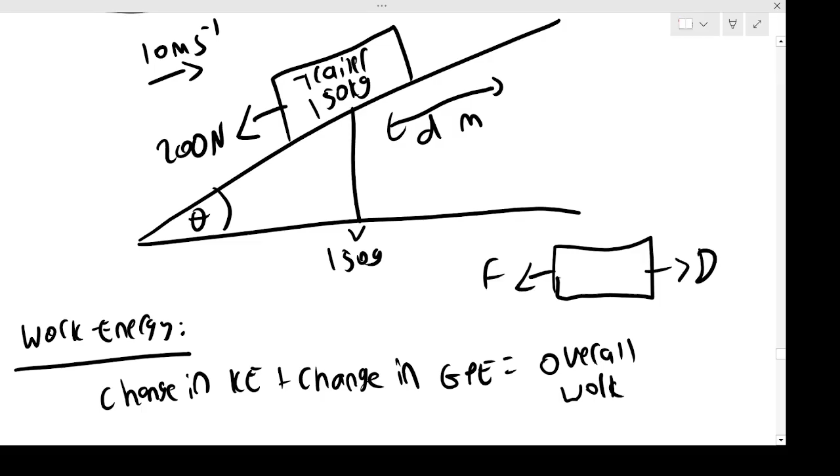We said the work energy principle from last time, that the change in kinetic energy, add the change in GPE, is equal to the overall work. Okay, and so the overall work, if I just draw a little rough diagram, if I have a driving force forwards and a friction or a resistance force backwards, the overall work, I'll make a note of it here, is work forward. So the work of the forward force, which is D, take away the work backwards.

We could squeeze it in here. Okay, work backwards, so the work of friction force. Okay, so there we are. That's the work energy principle. Hopefully you're familiar with this. So firstly, we're going to need to work out a change in our energies. Firstly, the change in kinetic energy.

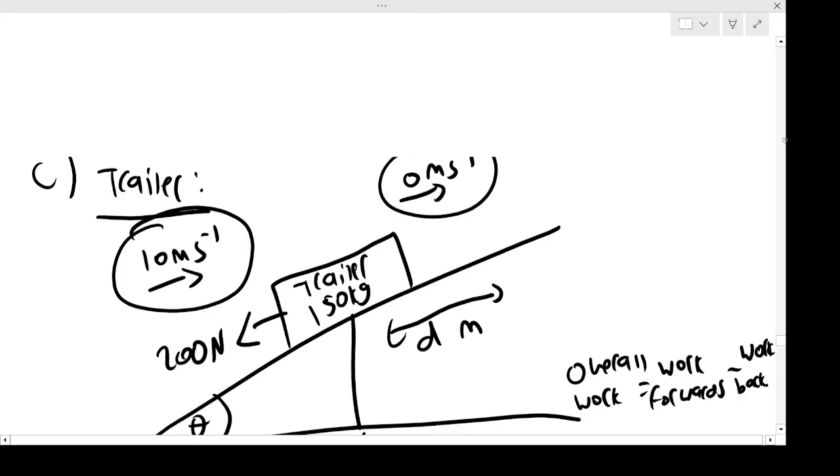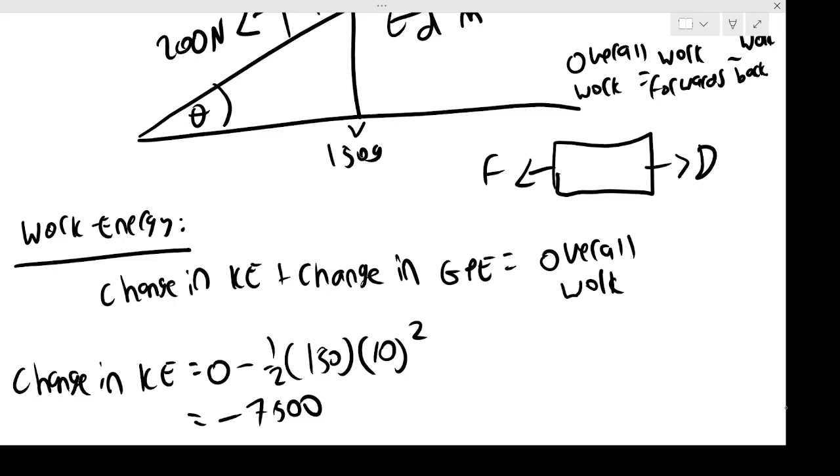Well, as we have here, the initial speed is 10 and then it goes to 0. So the change in kinetic energy: the final is 0. So it's going to be 0 take away half mv squared, half m of 10 squared. So half of 150 for the mass times the initial speed, which is 10 squared. If I work that out, I get 0 minus 7,500. Again, it's negative because it's a loss, okay? But let's leave it as a negative.

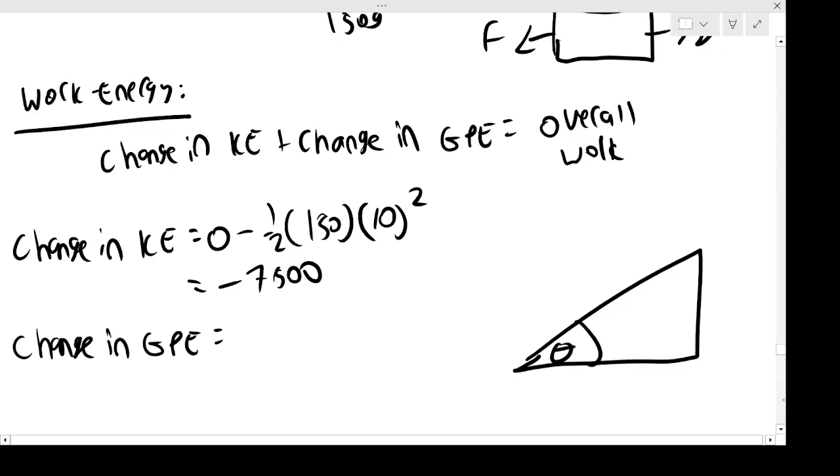Then the change in GPE. So now we're looking at the change in the gravitational energy, so the height change. Now the height change is the vertical height. So if we're going up the ramp by d meters, what's the vertical height? To work out that height, we're going to need to do a triangle to help us see. So our theta here, this is my height h I want to work out. If I'm going up the ramp by d, the height h is going to be, if we use a bit of SOHCAHTOA, d lots of sine theta.

So remember, sine is opposite over the hypotenuse. h is the opposite. d is the hypotenuse. So therefore, sine theta is h over d. Times by d, d sine theta is h. That's where that comes from. Right. But we also know sine theta is 1 over 15. So actually h is 1 over 15 d. So that is the height change.

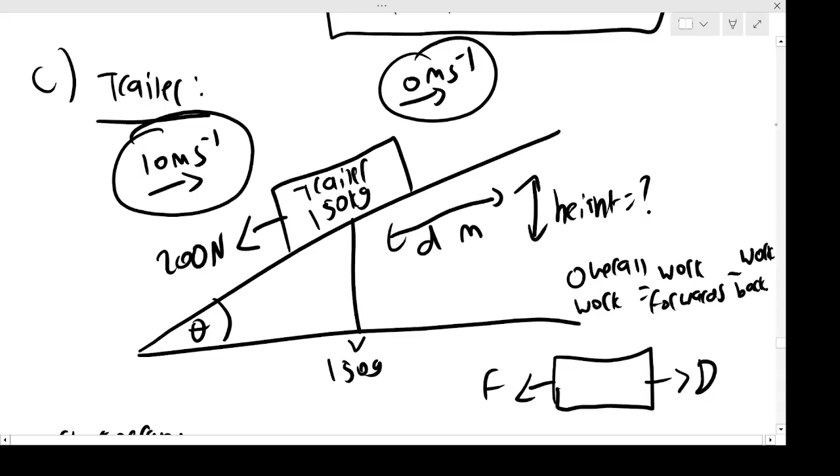So the change in GPE is mgh, if you recall. The mass is again 150 times 9.8 for g. And the height is 1 over 15 lots of this d. It's going to be positive because it's going up the ramp. We can simplify this to 98 lots of d. Therefore I can now use this work energy formula up here. The change in kinetic energy is minus 7500, and the change in GPE add 98d is going to equal the overall work.

But as I discussed, if an object is moving forwards by a force and backwards by a force, the overall work is the work done forwards take away the work backwards. Well, of course, with the trailer here, there is no forward force. So if there's no forward force moving it forward, there's no work done forwards. So this goes to 0. That means minus work backwards is going to equal 98d minus 7500.

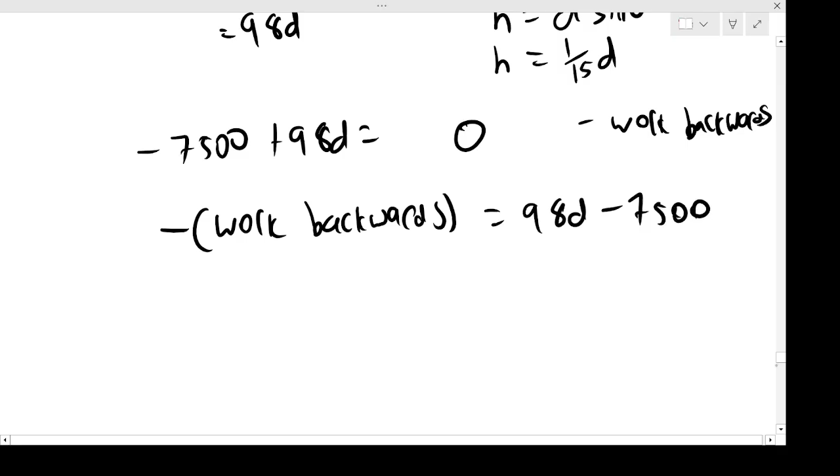So hopefully you're with me here. That's the simplified equation. I want to flip the negatives, essentially. So the work done backwards is going to equal 7500 minus 98d. Just flipping the negatives to make the work backwards positive, because there's a negative here, and that is because we're taking away work backwards. So that's the work done by the backwards force.

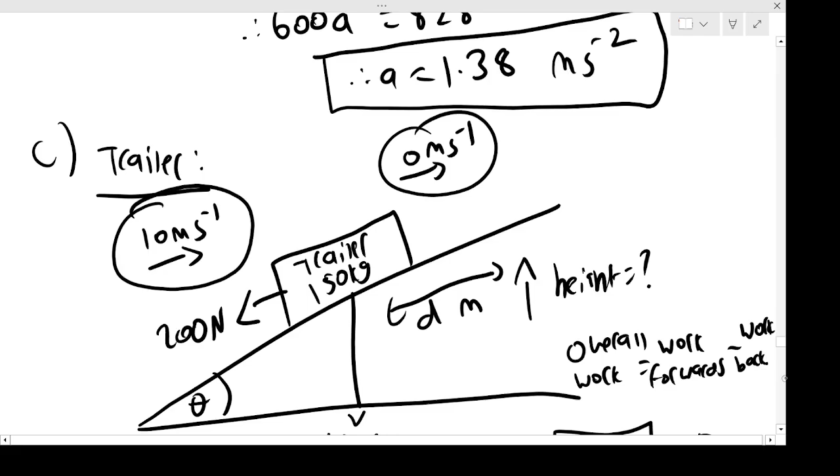Now the backwards force is the 200 Newton resistance. So we can work that out using the work formula, which is work is force times distance. The backwards force is the 200 newtons, and the distance travelled is d. So if we substitute that in, the work done backwards, 200 lots of d, is going to be 7,500 take away 98d. At that point, it becomes quite simple to solve for d. So 298d is 7,500, therefore d is going to be 25.17 meters, 2 decimal places.

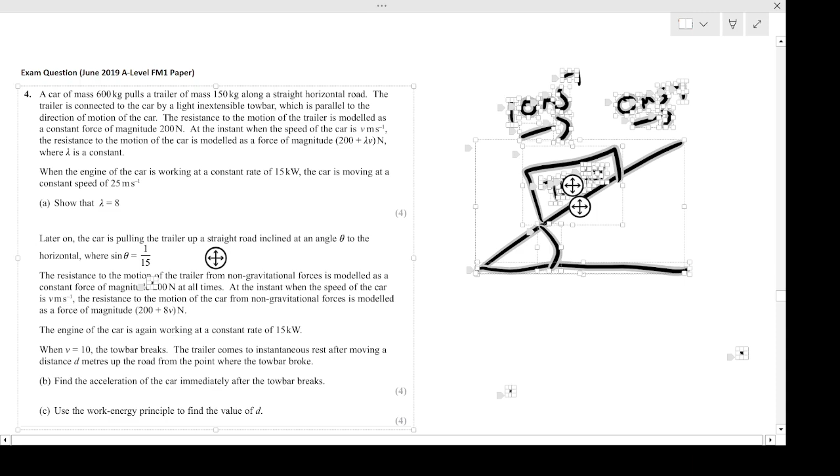And there we are. That's that question done. Very, very meaty, potentially horrible question, but a somewhat interesting question. It combines everything we've done together in one question. So if you really want to test that you know everything in this chapter, this is a really good question to go over. It brings everything together in one. So hopefully, if you go step by step, that makes sense.